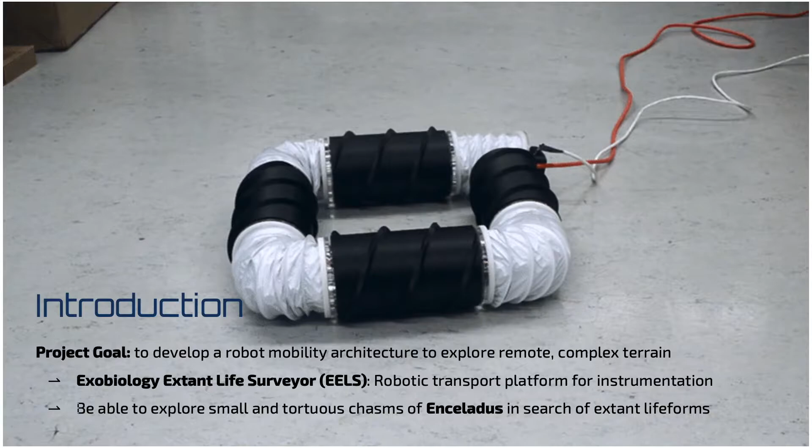The robotic platform was developed to be a mobile robot to explore remote, complex terrain. In particular, the project's goal was to design a robot intended to be a transport platform for instrumentation, capable of exploring small tortuous chasms of Enceladus in search of extant life forms.

The inspiration for the Archimedes screw design used as the platform's active skin comes from ancient Egypt. The design was used to lift water from the Nile and possibly used to irrigate the Hanging Gardens of Babylon. Archimedes documented these designs when visiting Egypt and was incorrectly attributed as the inventor of the screw mechanism.

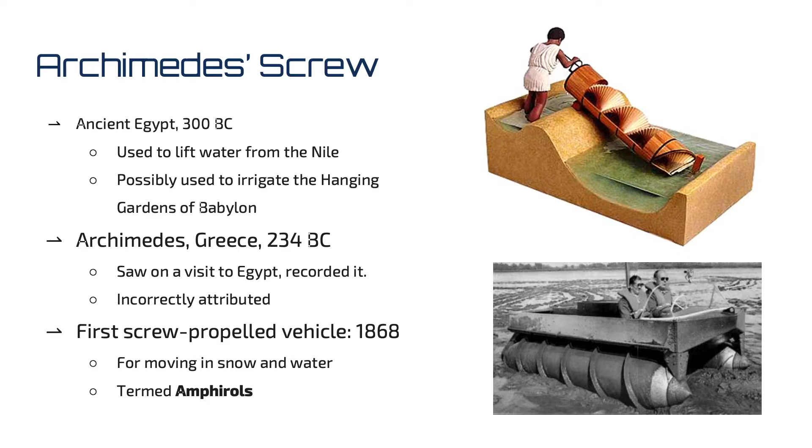The first screw-propelled vehicle, known as amphirols, was designed in 1868 and used for moving in snow and water. Similar to this vehicle, our robotic design will utilize the Archimedes screw for locomotion.

The design also incorporates a U-joint to reconfigure the robot body in constrained environments. Finally, it is designed with modularity in mind and consists of 4 modules and a head unit.

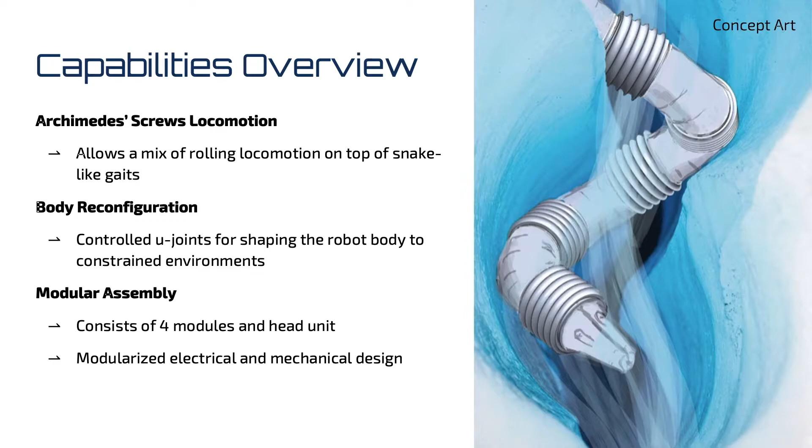There are 3 major components to ARCSnake's design. The first is the mechanical portion, which covers the Archimedes screw shell and U-joint. The second is the electronic portion, which includes the onboard embedded system and sensors. Lastly is the software design, which covers the communication channels and control architecture.

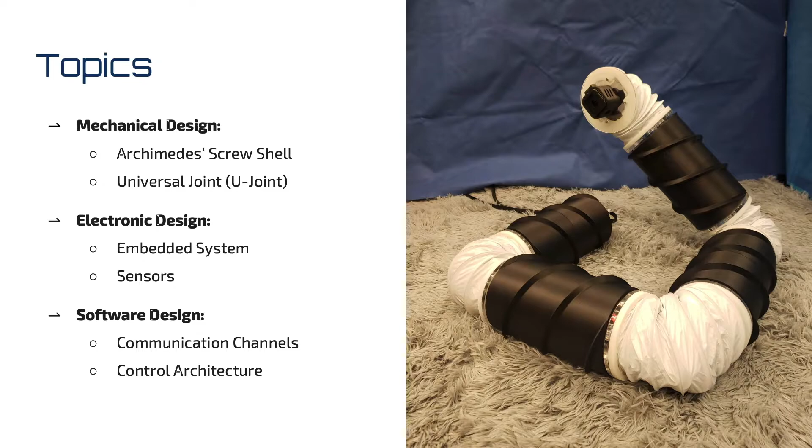The Archimedes screw module is the active skin in the design. The outer screw shell is coupled to the inner shell through a bearing. The inner shell houses all the electronics and the motor driving the Archimedes screw.

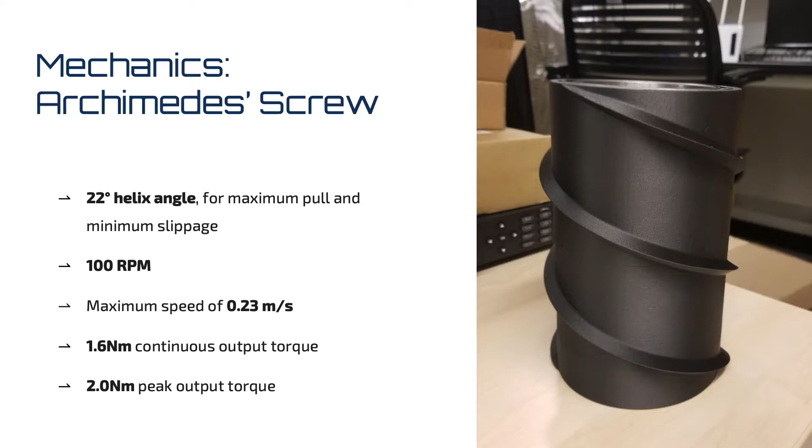The Archimedes screw was designed with a 22 degree helix angle for maximum pull and minimal slippage. It can also reach 100 RPM, resulting in a speed of 0.23 meters per second. Lastly, it has an output torque of 1.6 Newton-meter continuous and 2 Newton-meter peak.

A U-joint is placed between each Archimedes screw module to reconfigure the shape of the robot. We chose to use a pitch-yaw configuration for the U-joint since it avoids gimbal lock when nearing the straight configuration, since our snake should operate in the near straight configuration when exploring tight chasms.

A timing belt provides the final gear reduction for the U-joint due to its low backlash, high load rating, and high stiffness. The U-joint is capable of moving at 87 RPM with an output torque of 2.1 Newton-meters continuous and 2.7 Newton-meters peak. This is enough power to lift an unsupported attached Archimedes screw module.

Magnetic encoders are also used in the design to provide absolute positioning of the U-joint.

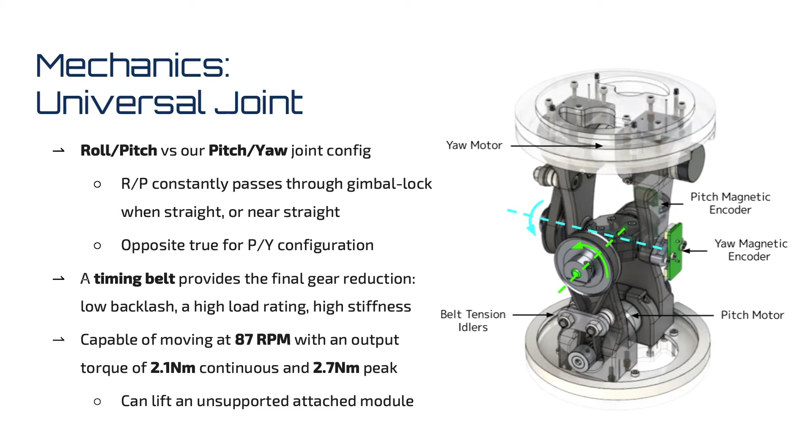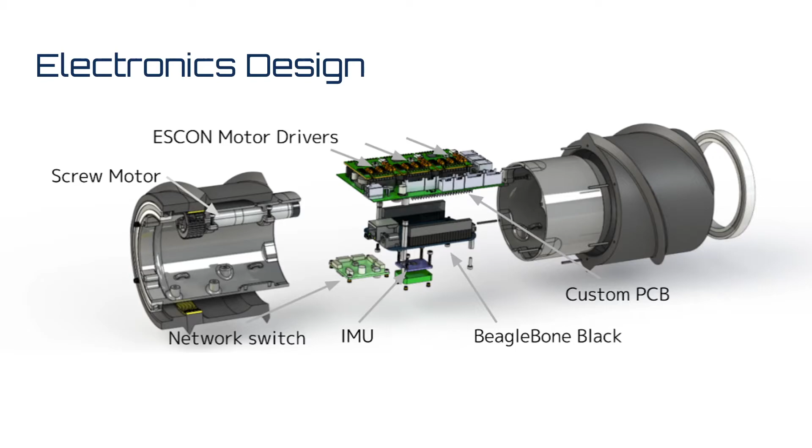The electronics are designed with modularity in mind and housed in the inner shell of the Archimedes screw module. The onboard embedded system used in our robotic platform is the BeagleBone Black. Each module has a self-contained embedded system, network switch, and IMU for scalability.

Buck boost regulators are used on the custom-designed PCB to regulate the voltages supplied to all the onboard electronics. These regulators provide robustness against voltage disturbances due to sags from long cable runs.

The 3 onboard motor drivers drive the Archimedes screw motors and U-joint motors. There are multiple built-in safeties from the electronics, such as temperature protection, voltage and current protections, and range of motion limits.

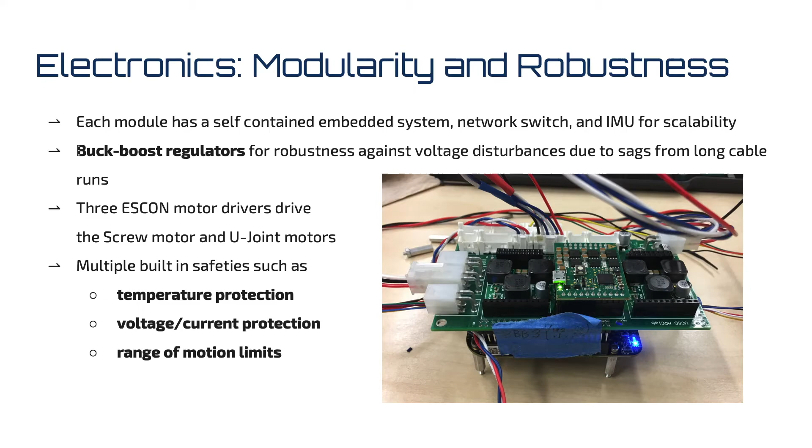The software communication and control architecture was also designed with modularity in mind. The remote desktop runs a ROS control node and ROS's visualizer RViz. The desktop's ROS control code communicates via network with the onboard control code.

The onboard control code reads from the IMU and encoder sensors. The encoder readings are then used as feedback to a PID controller, which regulates the motor's position.

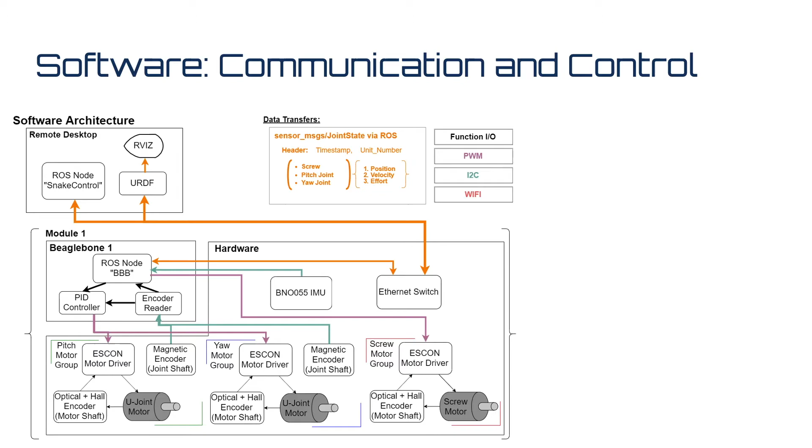The motor control code is scaled to all 3 of the onboard motors per module. The onboard control code is run on all modules and daisy-chained via the Ethernet network switches.

Finally, there is a camera attached to the head of the snake which communicates via Wi-Fi to the remote desktop.

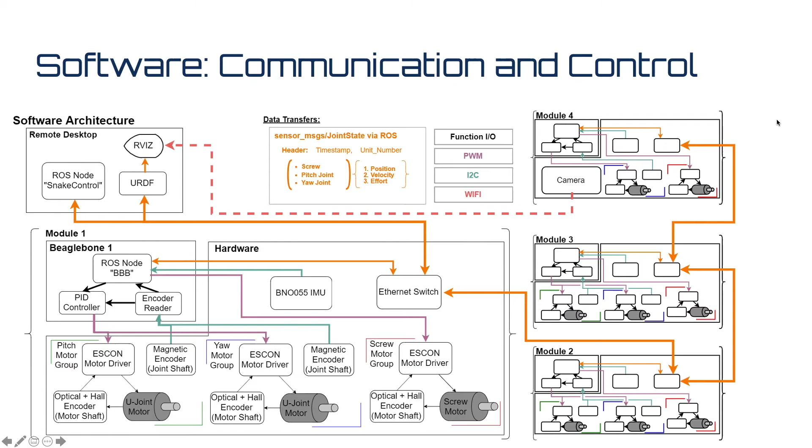Validation of the system was conducted through various laboratory experiments. These include the ability to regulate the U-joint position across varying input voltages to the modules, torque transparency for force control of the U-joint, thermal performance of electronics under heavy load, and finally transitioning between configurations for locomotion.

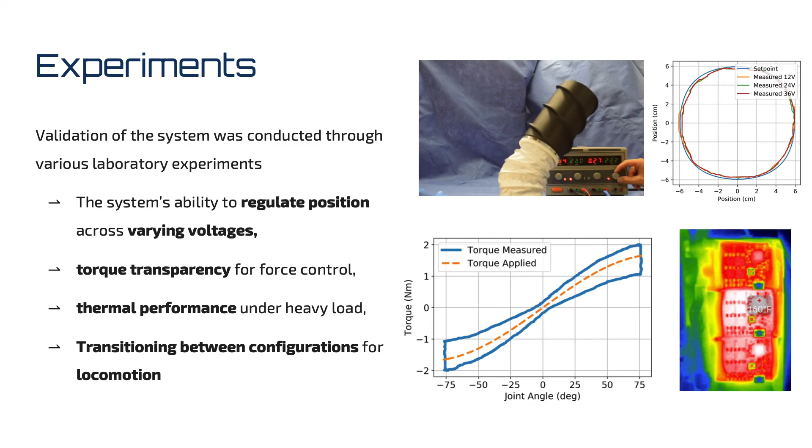Here the snake is transitioning from a straight configuration to an M configuration, to a square configuration, and lastly back to a straight configuration.

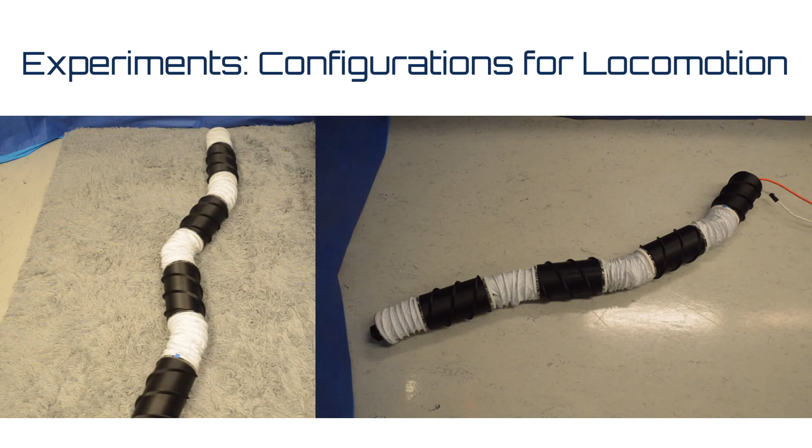We also experiment with locomotion in the M shape and square configurations. These locomotion results show promise in ARCSnake's ability to traverse a large variety of terrains due to the many possible configurations for locomotion it can have.

For future work, we are investigating more configurations for locomotion and their performance in different terrain.